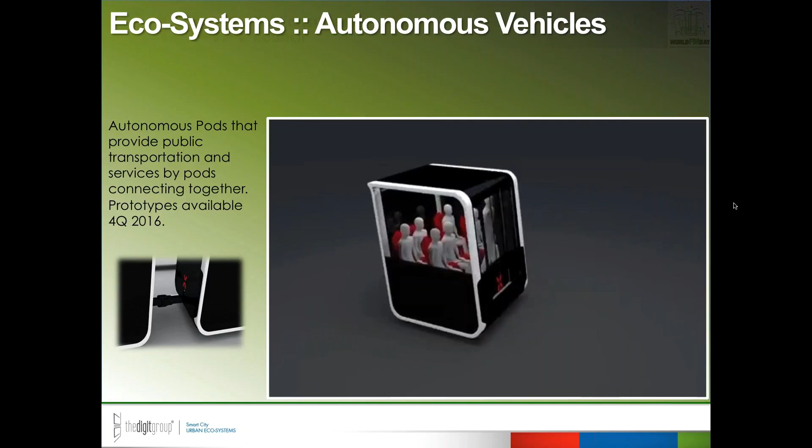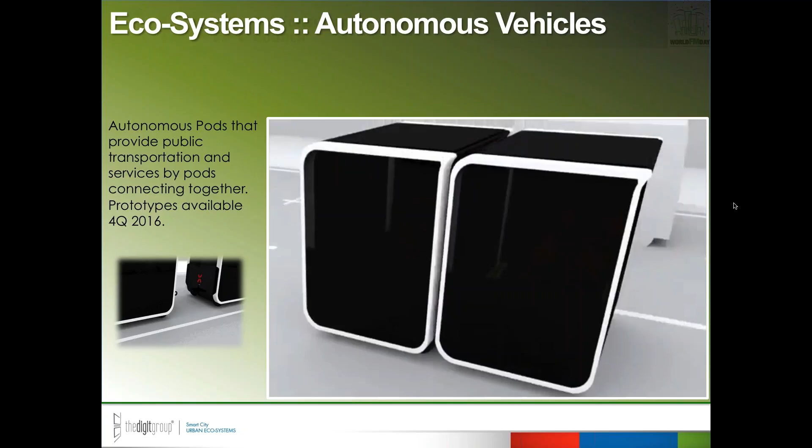Here's one example of what an ecosystem could look like. We have a transportation system in every one of our smart cities, which right now counts for 36 greenfield smart cities around the world—that's our real estate development package currently on the boards.

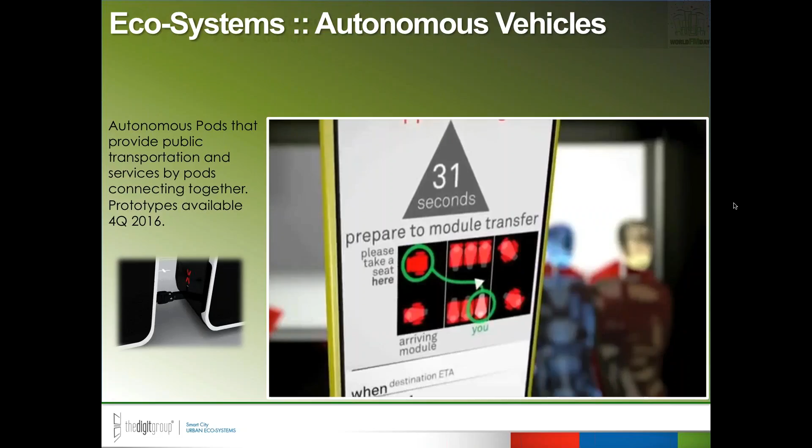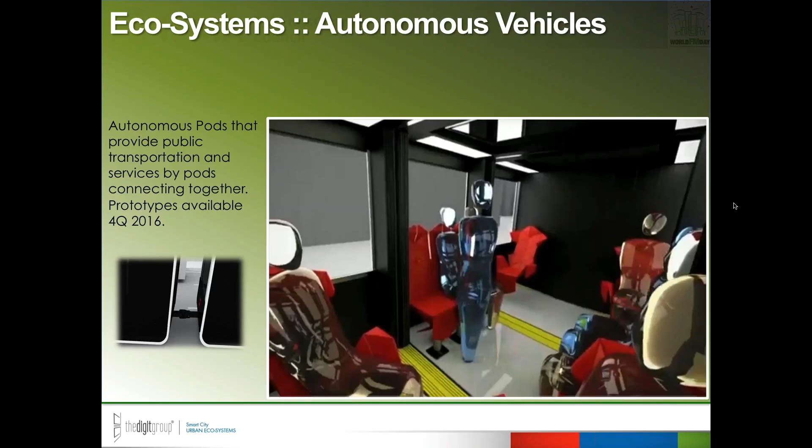What we're doing is that in certain districts or certain cities, we only have autonomous vehicles. They're being manufactured right now in Silicon Valley with a group called Next that we're partnering with out of Italy. What these pods do is act as transportation devices that can connect together when you want to have services.

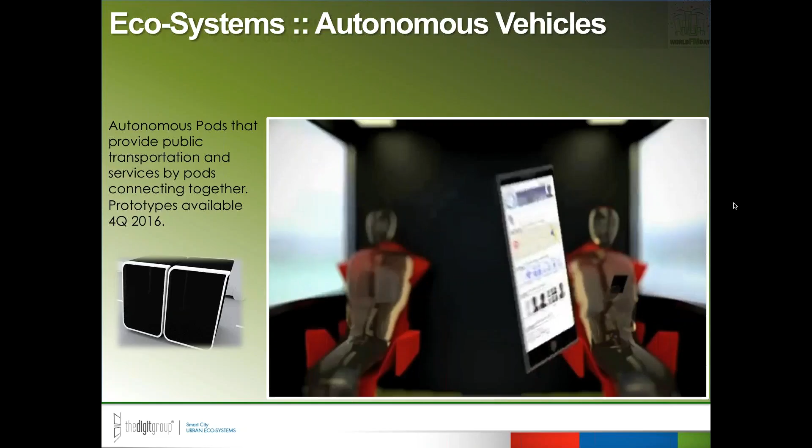So we're rethinking going to work. Why do you need to stop off at Costa Coffee or Starbucks when you can have that service vehicle attached to you on your way to work? This starts to make us rethink what our cities want to be.

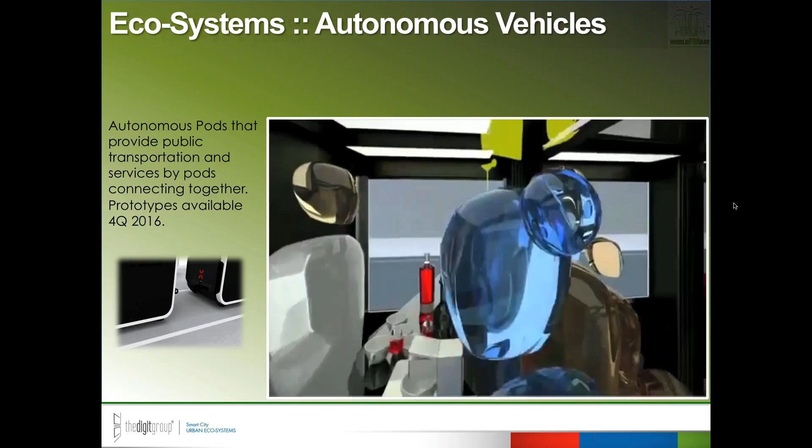150 years ago, there was a brand new innovation called an elevator, and it fundamentally changed the shape of cities. What we're seeing now with automated autonomous vehicles, and the whole world of IoT, the Internet of Things, interacting with these new ways of transportation—we now have narrower roads, no need for traffic lights, and no need for parking lots.

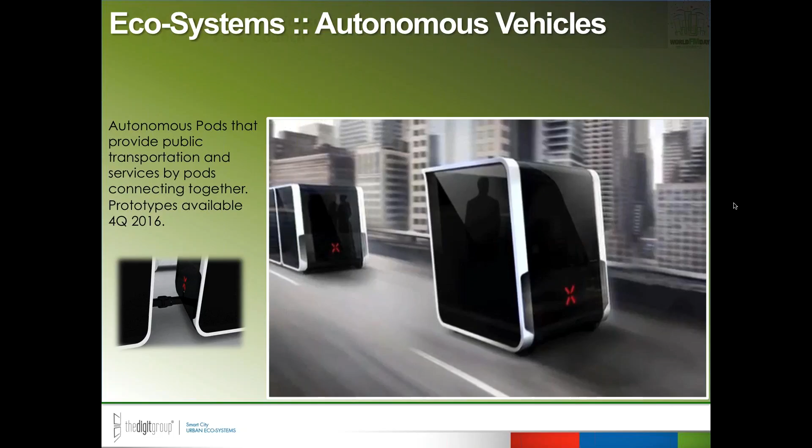Because these pods continuously roam around the city, almost like Uber or any of the other ride-sharing systems out there. The way this works is that it runs like blood through veins and arteries—again, that biomimicry, getting back to the organism rather than the machine.

That frees up the way you get around town. We have operating systems that will guide these autonomous vehicles because we are building it from scratch. This is not meant to be used in a hybrid situation—in other words, there are no motorized vehicles in these cities.

Now, that's one ingredient, and it's a fantastic one. We'll have these up and operational to show in October in Berlin, and in Dublin and Lisbon in November. The actual implementation of this will happen first in Saudi Arabia, which we'll show you later.

So yeah, autonomous vehicles are here to stay, but that doesn't mean that's a self-driving car. We're actually now trying to reimagine what that really means.

Now, what does that mean for facility managers? Well, this means that the whole idea of parking lots goes away. This also gets into the autonomous vehicles of things like delivery and emergency services, those types of things that would override certain autonomous vehicle needs.

But for the most part, when we're talking about mass transportation, we have to rethink what we're managing, right? How do these pods, especially service pods, affect healthcare? Because the way these pods are being designed, we can combine larger size pods that would be for your doctor to actually come make a house visit.

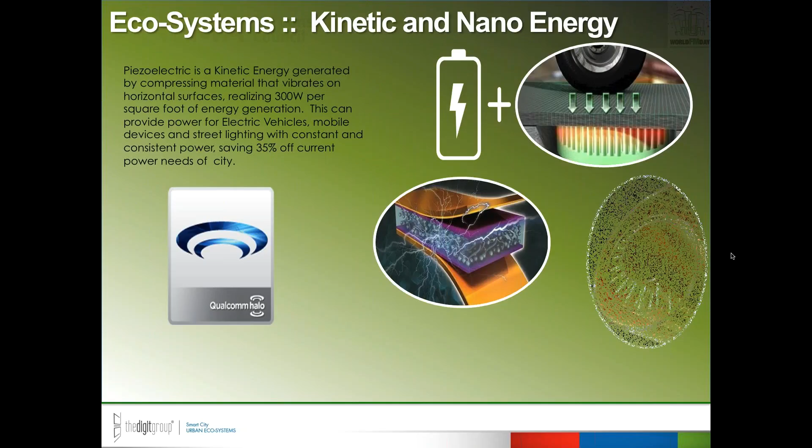We have an agreement with Georgia Tech University in Atlanta, Georgia. They have a kinetic energy lab that is creating the next generation of clean tech. Clean tech 1.0 is solar, wind, and water - three very inefficient and, quite frankly, non-cost-effective ways of introducing alternative energy from fossil fuels. So this next generation is saying we need to rethink how we capture energy.

There are two big ways in kinetic energy that you can start to collect this: compression, or in Latin piezoelectric, or friction, which is called triboelectric. Between the two, we have horizontal surfaces and vertical surfaces, compression and friction.

With compression, we've made amazing strides in how to actually create energy. For the interior of an office building, we've partnered with Interface Carpet to be the substrate underneath commercial grade carpet. We can also be underneath wood flooring, ceramic tile, anything like that. Right now we're generating 300 watts per square foot of energy generation, interior-wise.

That allowed us to take an extra step: what would happen if we put this exterior, underneath concrete, asphalt, or rubber? This is where the energy generation started to get really hot, because we're not just talking about feet or people running or jumping up and down. We're talking about vehicular traffic generating a lot of power, because the way the compression system works, as you compress the pads underneath that finish, it's actually exciting the molecules that create energy.

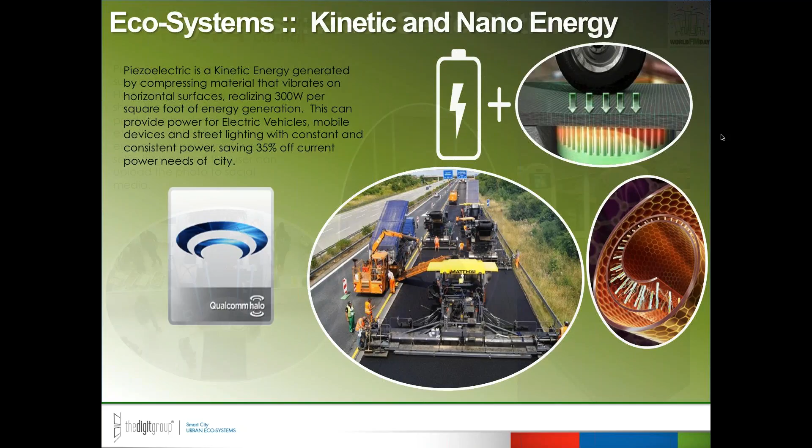This begins the idea that behavior change can happen. The way Piezo works, especially in the interiors for facility managers, is that our new buildings, the majority of them, will not have electric outlets because there's no need for them. We're generating enough energy by people walking, jumping, and running on the piezo pads that with our Halo product from Qualcomm, we can dynamically charge appliances, equipment, lighting, your iPhone, as long as you're in that environment. This is a real behavior change and a real shock to the system to say, wow, we can actually have a microgrid that makes sense.

Next slide, please. Another place we're experimenting with this idea of people's behavior change is that this isn't all about solar and wind and water.

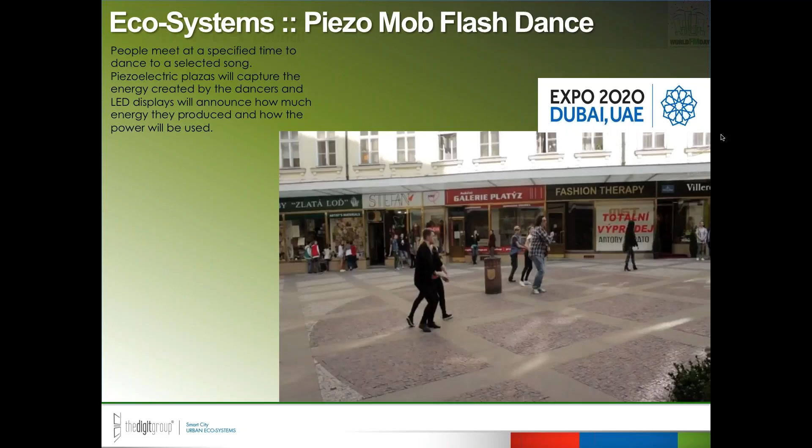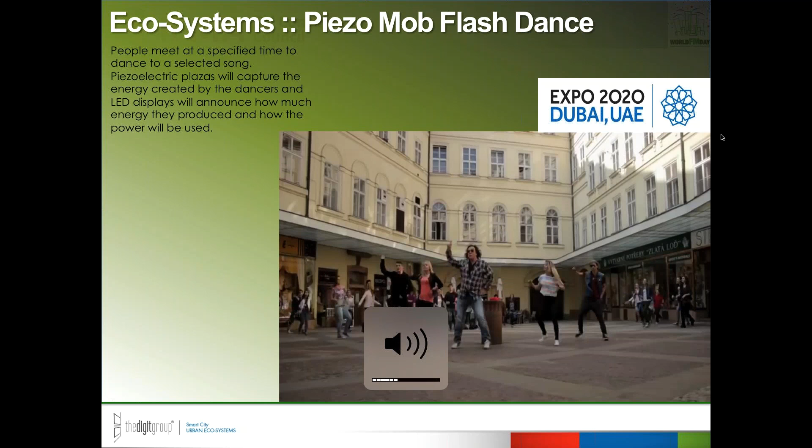There's a different way of exposing ourselves to this: in Dubai, for the Expo 2020, there are 5 open plazas. What we're doing is leveraging the app that you have to use to get into the different world pavilions during the World Expo, so we're able to push information out. That push allows us to say, why don't you go to plaza number 3 at 2:15, hit the play button, put in your earbuds, and dance along.

We have a mob flash dance, dancing in the streets on top of our piezo system. We have LED screens surrounding this plaza, and you're able to see the power generated go up and up and up, and at the end of the song, we're able to say, thank you very much—just your dancing alone has now captured enough energy to light this plaza tonight.

Next slide, please. So now we have the ability, again, to generate power just by movement. We have the ability to have autonomous vehicles and EVs, electric vehicles, actually be powered. We have the ability now to have behavior change. But what else can we do in this ecosystem?

What we're able to do is point that electricity to different areas of usage, like streetlights, because they're right near that particular roadbed, so we can shove the electricity over to those lights. The lights are LED, and LED in the light spectrum can host certain types of digital platforms, like IP, Internet Protocol. Next slide, please.

What we're able to do with these LED lights is use a diode made by a company out of Sunnyvale, California called Sensity. What we're able to do with Sensity is put a diode in between the bulb and the house casing of that street light, and we get a 10 gig Li-Fi network.

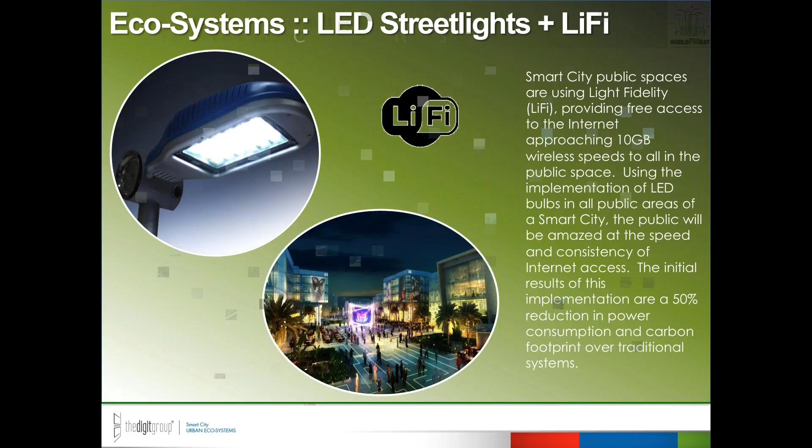So now let's look at the entire world of what we've just done. The ecosystem is power generation, power storage, power distribution. We're able to run vehicles, appliances, and all sorts of equipment. And then, of course, at the end of the day, we're able to light things and actually have Wi-Fi. That's what we call an ecosystem.

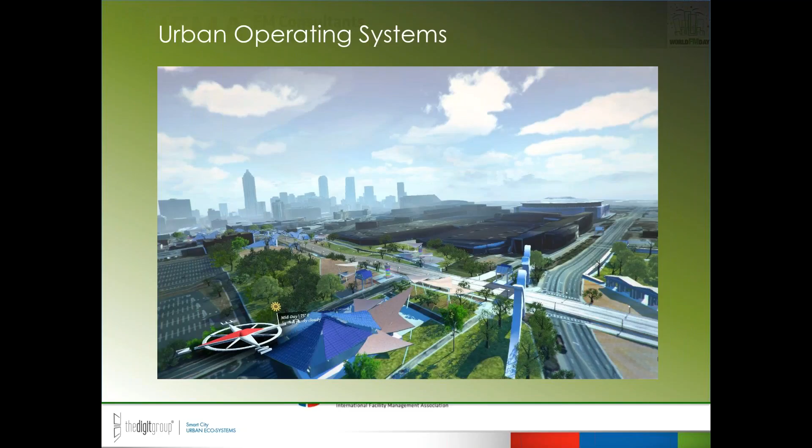That is the new world that facility managers are going to have to get their heads around really quickly, because we are implementing this. It's no longer something that says, well, it's going to be there someday. Someday is now. So how do you manage this thing?

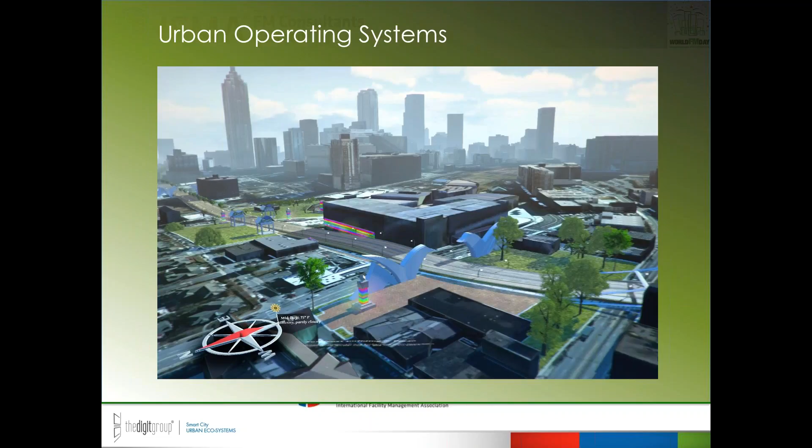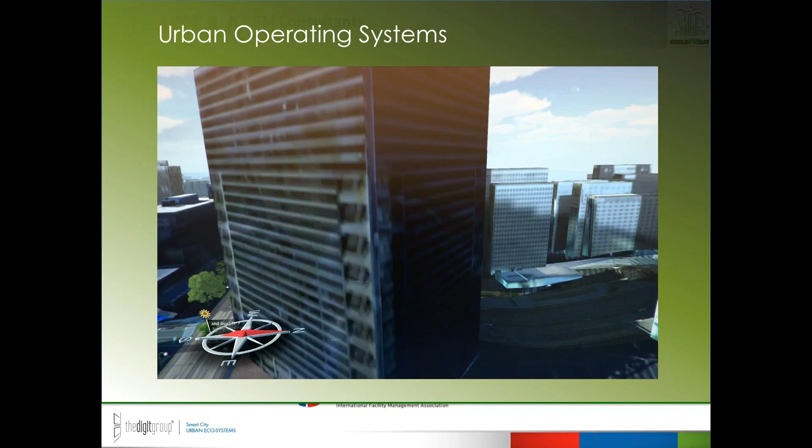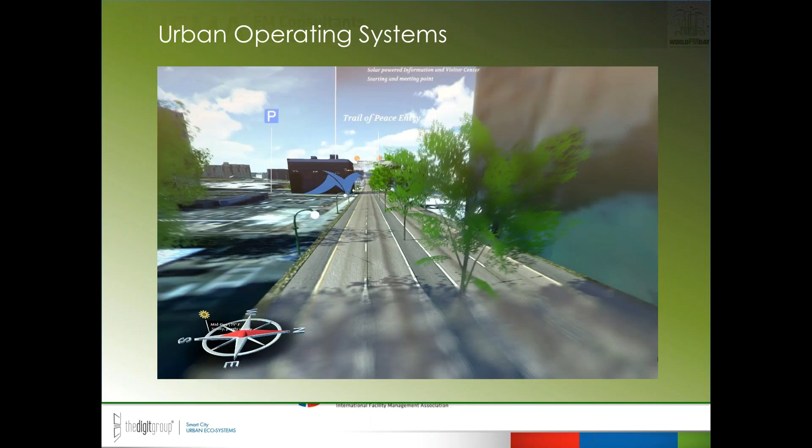What you're looking at right now is a management platform from an urban operating system being used right now in Atlanta. We actually have 83 different cities using this type of system. It's a 3D portal to other types of data underneath. Google Earth and Bing are cool, but this is even cooler, because any type of data you have in the back end that you need to manage on a grand scale—be it a campus, or in this case, the entire city of Atlanta—you can now start storytelling or see information in unique ways that help you make a better informed decision. So when we're talking about how you manage those ecosystems, this is one tool we use.

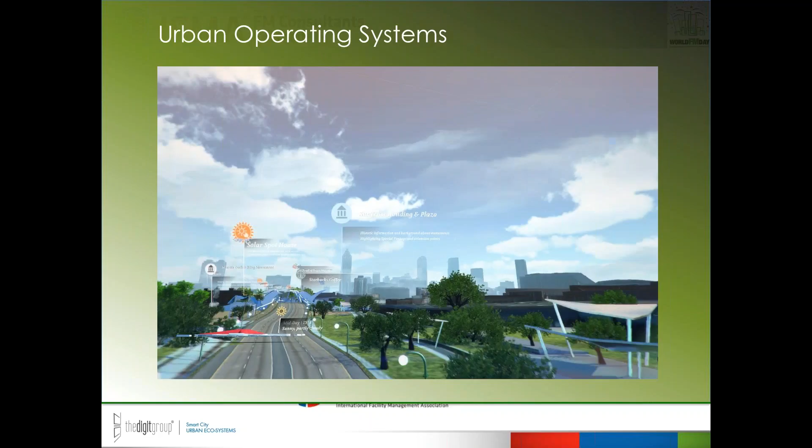Now, we're creating our own problems, actually, because think about when we have an energy-producing system embedded in the roadway. Who's going to manage that? Is it the power company, or is it the Department of Transportation? This is why high-performance urban environments are going to need sophisticated tools like what you're seeing.

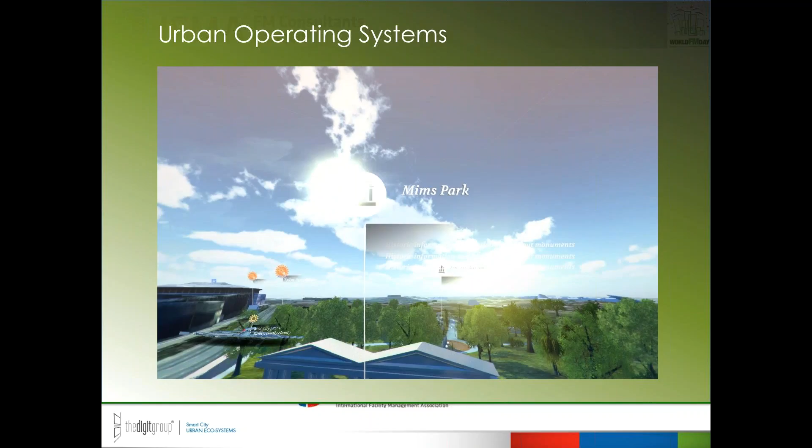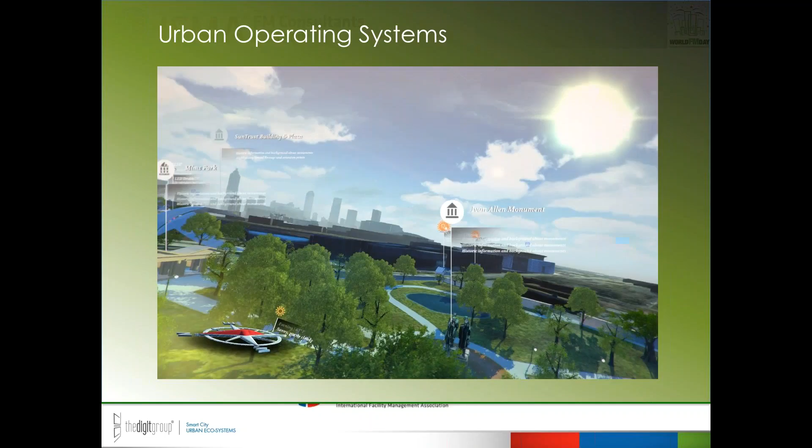Now, the cool part about these tools, in this case this is a tool called Orbi, is that they can run on any device that has a web browser. So your iPhone, your iPad, anything that runs a web browser, which means you can actually take things out into the field and start the real usage of things like augmented reality with data, being able to see things in different ways and take action.

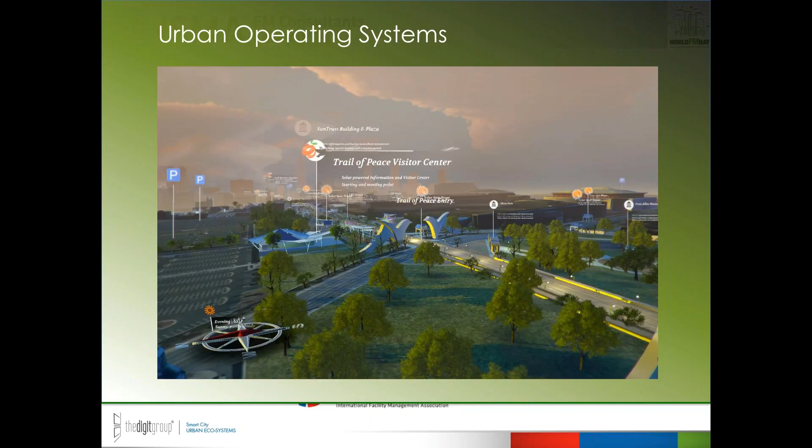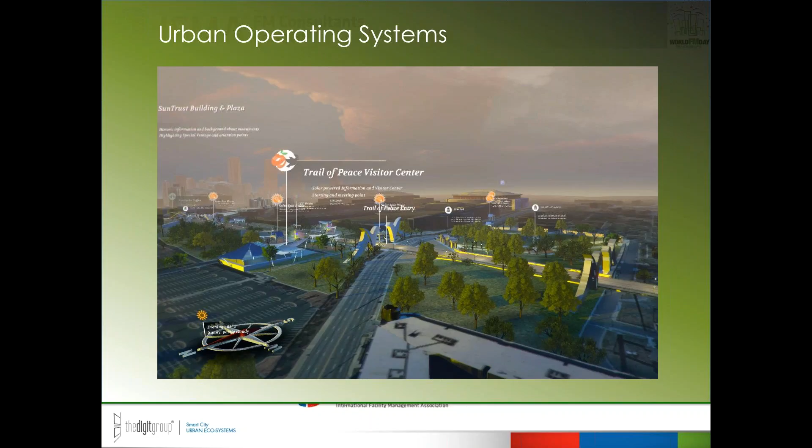So when we're talking about the capturing of this data, how it works, how it can be used and reused for management purposes, we tend to not want to disrupt the existing systems that you're using today. In other words, if you're using Maximo, or Tririga, or any of these FM tools that are out there, what this does is allow you to click dynamically on a certain element within this cityscape, and then get into that particular session of that particular software. So this is meant to be something that sits on top for easy management, and then be able to go down and actually see what does this thing do.

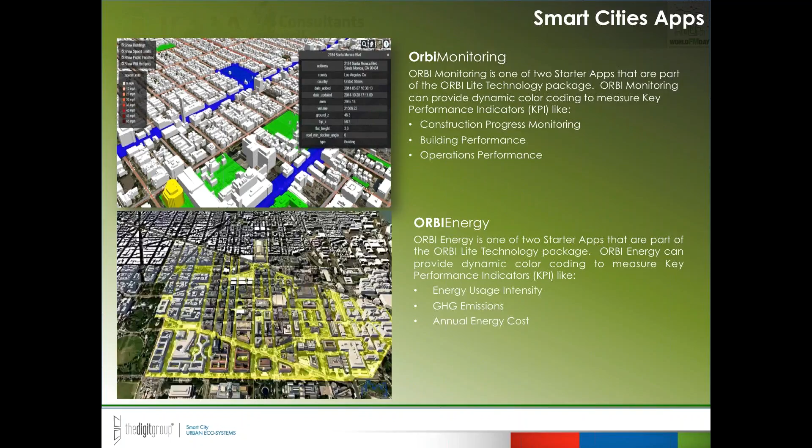So the fun part about this is that we're finally breaking free of reporting in an Excel spreadsheet with a bunch of graphs. No, you can still get that, but the idea is that we live in a 3D environment. We should be managing in a 3D environment, and the powerful nature of how this all operates can't be understated, because now you're providing a way of moving around space and actually taking actionable items that make sense for certain roles and certain responsibilities.

Meaning that the old days of thinking you needed to have a mission command center, an operations center type of thing, where you have a wall of different video TVs and whatnot - you don't need to have that anymore. Where the actual practical need is, you're out in the field, it can actually be on a mobile device.

So I wanted to show those as examples of just bits and pieces of a much greater scale. I mean, we can go on for hours about all the different innovations that we can do in different types of ecosystems that make up cities. But I thought it would be appropriate to actually show what these cities look like for real. That this isn't just a PowerPoint, this isn't something that is going to happen in the future - it's happening right now. And I wanted to show you our first project that we got started with, called the Kingdom City, which is in the northern suburbs of Jeddah, Saudi Arabia on the west coast.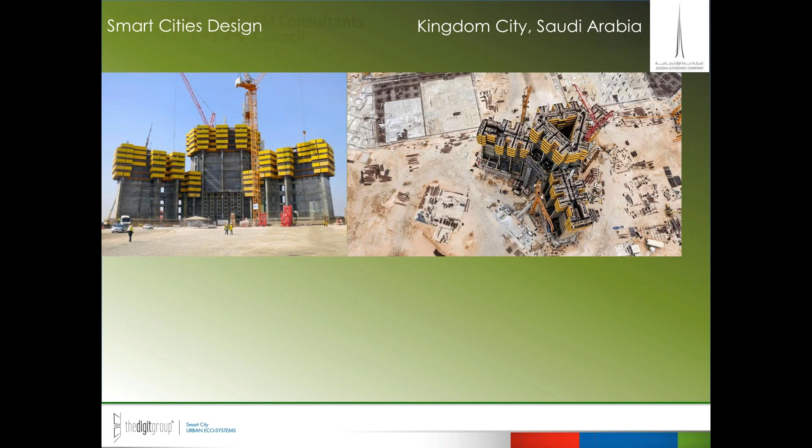And this city is the world's first city to be DC powered only. There is no AC current necessary because the way we've designed this is that each one of the buildings you see here is its own microgrid for energy and water, which means we don't need the transmission lines, we don't need those step downs. We're into this whole new world now that says the Kingdom Tower and the city surrounding it is going to be operational by the end of 2019, where we will have automated vehicles. We will have this DC powered way of working.

And the cool part about that project is that we do not have enough workers to actually build the tower and the city at the same time. So we're using digital fabrication for the city for the majority of the buildings, and where that's being done - in China. So this is how this ties back, this entire presentation, into why China, what's happening with China's facilities. All the things you've seen happening elsewhere, like in Saudi Arabia and whatnot, tie back - the roots are happening in China.

We have 5 factories in Beijing right now using BIM, building information models, at fabrication level, that go through CNC machines fabricating different buildings with different materials in an aesthetically beautiful way. They're taken apart after a QA/QC process and put into shipping containers, then shipped to Saudi Arabia. That's how we're going to build this city on time, on budget, with 0 defects and 0 change orders.

It's a remarkable exercise to go through, where 15% of the manufacturing is already done, and we're anticipating learning so much from that project that others in the world said, since you already started this thing off, we also have needs. So our next project, we were invited into a project in Australia. This was announced originally on March 17th to the media, and as of this morning, we learned that Prime Minister Turnbull had the proper number of seats, 76, in the election that just concluded.

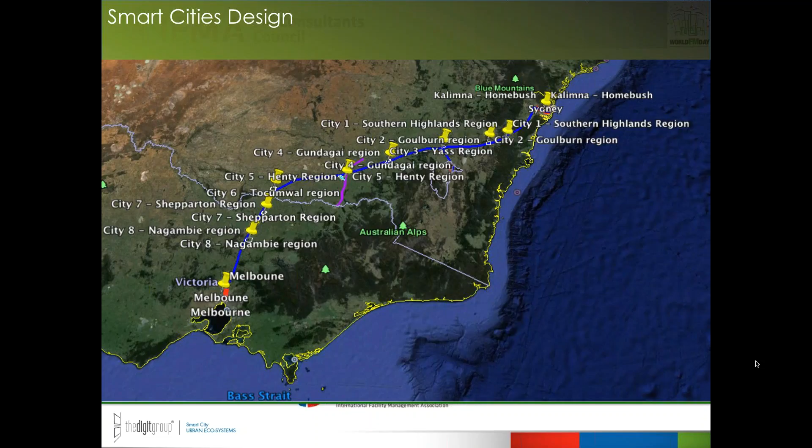So this leads us into the title of this particular presentation, which is, we have this opportunity now to... did I do this right? Maybe I should talk about Saudi Arabia first. Yeah, let's talk about Saudi Arabia first.

So this leads us into a second project we have going on, which is high-speed rail between Jeddah, where we have our kingdom city, and Riyadh, the capital. There's a project called the National Transformation Program, led by Crown Prince Salman, the son of the king. This is to move Saudi Arabia away from oil as its main economic engine, to something else. One of our projects is this massive initiative that will help redistribute the population throughout the Saudi Arabian Peninsula, create jobs, and improve the life of the average Saudi Arabian citizen.

The interesting thing about this particular project is that we need to rethink how people start to migrate over time, and how we create an authentic city—not drop-shipping a concrete jungle, but an authentic city that allows people to come and fall in love with it, where they want to raise their family, have their kids educated, and have great health care.

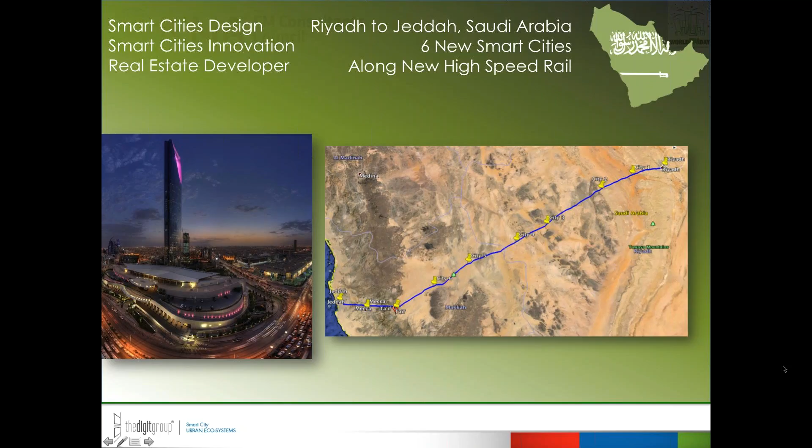Next slide, please. So this brings us to China, I hope. At the last minute, I took all these slides and reshuffled them here. And yes, here we go.

So what you're going to see is a video on the left-hand side that was created for the Olympic Committee, which chose Beijing—that hosted the Summer Games in 2008—to host the 2022 Winter Olympics. We're going to be reusing a lot of the buildings, like the Bird's Nest for the opening and closing ceremonies, and certain other buildings that were part of the Summer Olympics, and of course the Olympic Village for the athletes. That's going to be in downtown Beijing.

The ski resort areas are going to be about 200 kilometers to the northwest of downtown Beijing, and they're building a high-speed rail to connect those areas to the downtown area and the ski resort, so that your spectators, your media, your athletes can get back and forth.

There will be one stop about equidistant in between, about 100 kilometers, where we are going to be joint venture partners with the world's largest utility, State Grid. So we're going to real estate develop a brand new city from scratch that will be ready in about 4 years.

The fascinating thing about this project is that by using things like the IFMA Shanghai chapter and others to be part of that design process to begin with, we are recreating digitally what happens from the standpoint of operations, and how we as designers make sure that the pieces of data important during design and construction can have an extensible life, moving into facility management without having to recreate information. This is critical for managing these cities. It's almost like moving from a project management office mentality of design and construction, reusing the same data into facility management and urban city management instead of recreating it.

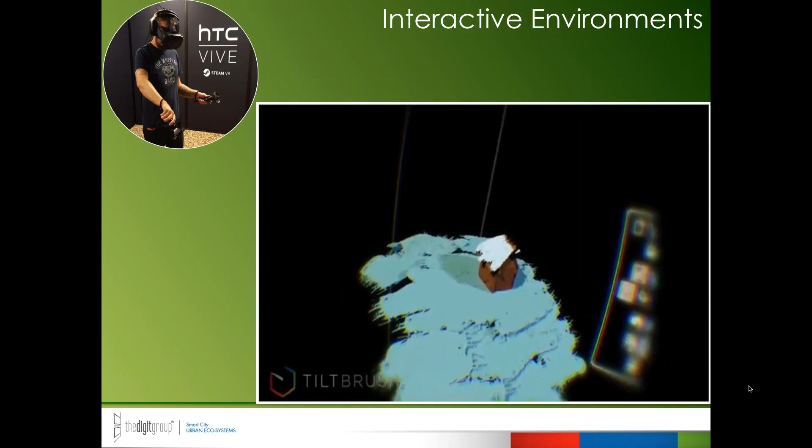If you want to see how history repeats itself, after MacPaint hit big, MacDraw came, which was actually a drafting program. We're now looking at the next level of where Tilt Brush goes, because we're looking at three-dimensional qualities of being able to create space and then manage space, all within a virtual reality environment.

We can actually set data through these 3D tools that will affect the physical environment. This is the big thing we're learning in China, the world of cyber-physical systems.

A lot of people use mobile phones, and through things like WeChat and other programs, they're able to write other apps on top of WeChat that can affect things like lockdown and lockout procedures, turning lights off, all these different things you can automate into an iPhone.

That's just spectacular. Probably the best example has happened since July 6th of this month, when Nintendo pushed out a product called Pokemon Go. This is an augmented reality tool that uses geospatial tags that allow you to play a game in an augmented way, where you hold up your phone and the environment is blank in reality, but what you see on your phone is this whole other world that has you going on a treasure hunt to try and find Pokemon.

It's the biggest thing ever to hit technology, and this is the way the world is going. The augmented and virtual worlds are colliding so that we can have a cyber-physical relationship based on trust of data, creating a different type of built environment we've never been exposed to before. It's almost like we're hitting the redo button, with a new blank canvas that's allowing data to create a more safe, more secure, and better user experience.

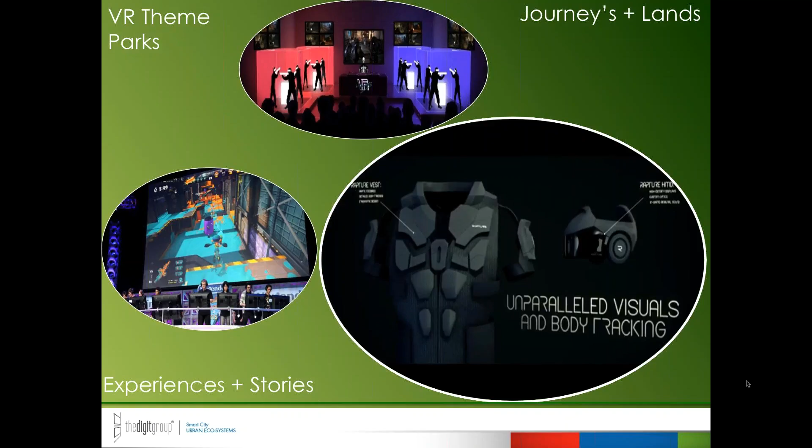Next slide, please. I believe the one I'm about to show you is what's happening with these theme parks, especially in Riyadh that we're building. We're actually sticking a 30,000 seat arena in there for spectators to watch other people play.

You think that's weird, but this past April at the Staples Center in Los Angeles, they had a 2D gaming championship where 42,000 people sat for 3 days to watch people play games. I don't get it, but the other generation does, as you see here. And this is the way things are going in the world of VR and AR. We have to pay attention.

There are lots of best practices still to be defined, and we need everyone's experience at this point, because what we don't want are the Nintendo guys defining what the built environment is, since people are so engrossed with the experiences of augmented reality that they're disappointed when they see reality. This whole relationship of trust is moving into a different space that, quite frankly, is the most exciting time I've ever seen in our industry.